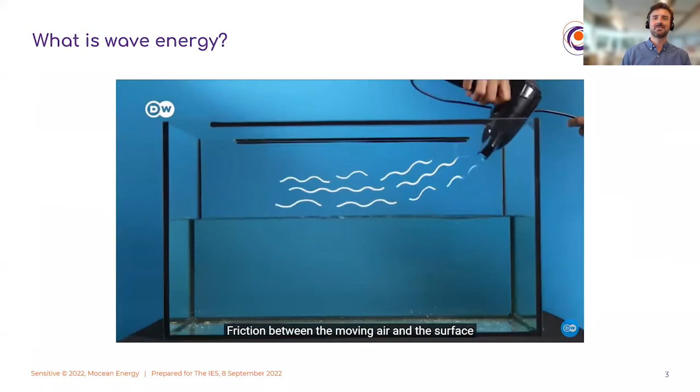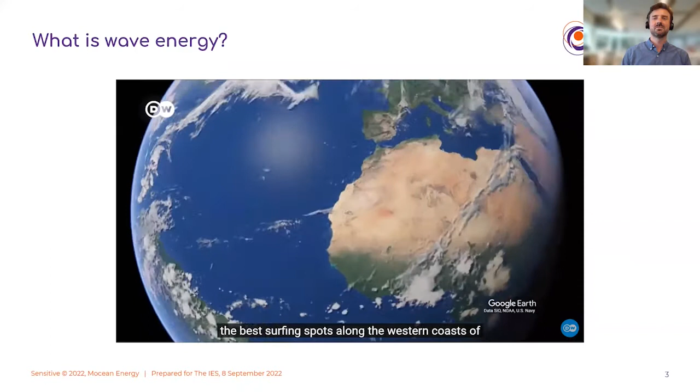For those of you who don't know, waves form when wind blows over the ocean. Friction between the moving air and the surface of the water causes ripples that eventually grow to form waves. The size of waves depends largely on three things: the strength of the wind, and how long and far it blows unobstructed over a stretch of water. Which is why you find the biggest waves and the best surfing spots along the western coasts of North and South America, Europe, and parts of Africa and Australia.

So with waves, it's not that each particle in the water travels from ocean to coast. Instead, each one remains almost in the same place, moving in a circle as it gets energized by the wind. The energy is then transferred along to the next particle and so on. They move with the most intensity at the surface, dwindling the deeper you go. Which kind of explains the sheer diversity of devices that attempt to capture different kinds of movement. At the surface, near the seafloor, and at the coast.

Okay, I'll just leave it there. I find that video better than I am at explaining what wave energy is. And it's quite a good video if anyone has the time, 11 minutes to watch it later on.

So now for a bit of background on Mocean Energy. So Mocean was founded by myself and a guy called Chris Retzler in Edinburgh in 2015. I'm American. I came over to Edinburgh to do my PhD at the University of Edinburgh, working on, surprise, surprise, wave energy research. Chris was the principal scientist at a company called Pelamis, which was once one of the biggest wave energy companies in the world, but unfortunately went into administration in 2014.

And Chris and I met up through the university, started to work on some ideas, and eventually formed the company. We had some funding from a funding body called Wave Energy Scotland, and that was staged. So the project got larger, the funding got larger, and that allowed us to grow the team. In 2019, we were at 6 people. And then more recently, this is a picture taken in 2021 at the launch of our Blue X prototype. And now we've got 19 people. So it's been very exciting growth over the past few years.

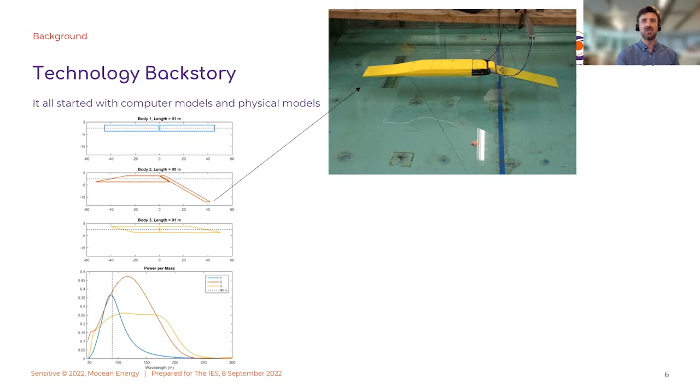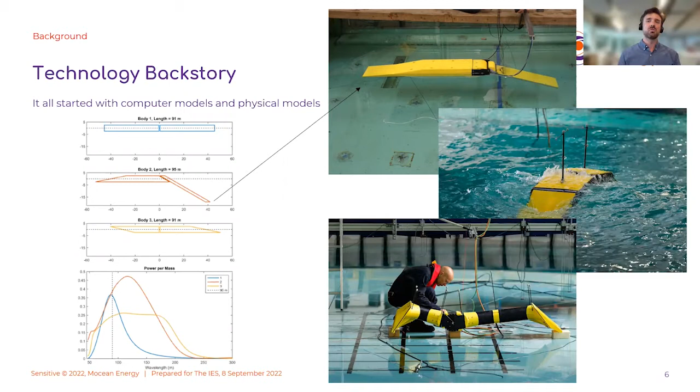And so we started out with fairly crude models, fairly sort of crude pictures, and then we built some physical models and tested them in wave tanks. But as we progressed through our technology development, those models became nicer and nicer, and so we just had a real opportunity to develop our technology.

The majority of that technology development has come through what's called the Wave Energy Scotland Novel Wave Energy Converter Program, or WES NWEC program. That started at stage 0, essentially just filling out an application for the program. That application consisted in part of this numerical modeling exercise and optimization that we did, that we presented and said, here's our idea. This is what we'd like to do.

We were successfully awarded a stage 1 project that we did in 2016. I would describe that as kind of a feasibility study. We further developed the concept. We further optimized it. We estimated the levelized cost of energy. We did some engineering. We kind of expanded on it. Then we went through another stage gate. So 8 companies were awarded stage 1.

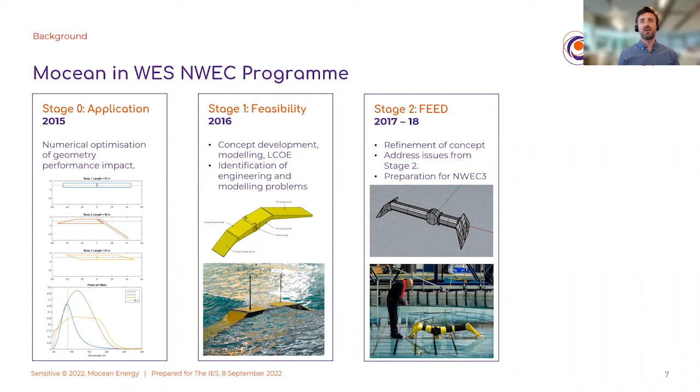They then down selected to 4 companies who were awarded a stage 2 project that went from 2017 to 2018. We further refined our concept. We addressed some issues that we identified in stage 1, and we prepared for stage 3. They then down selected again and awarded 2 companies 3.3 million pounds to build a prototype of the design that was developed through this program.

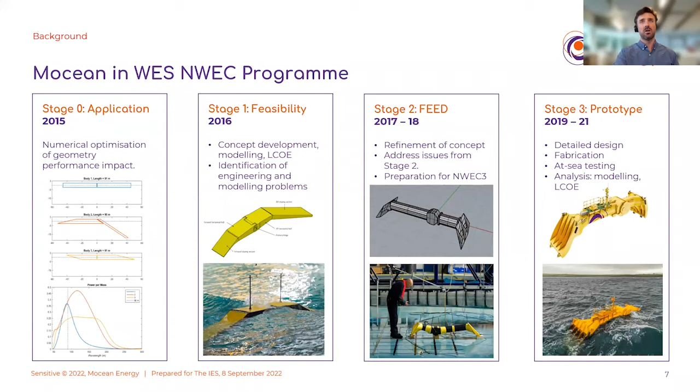I'll tell you more about that stage 3 at the end of this presentation. But that was a big launching point for us. Quite a big funding award, really enabled us to grow as a company.

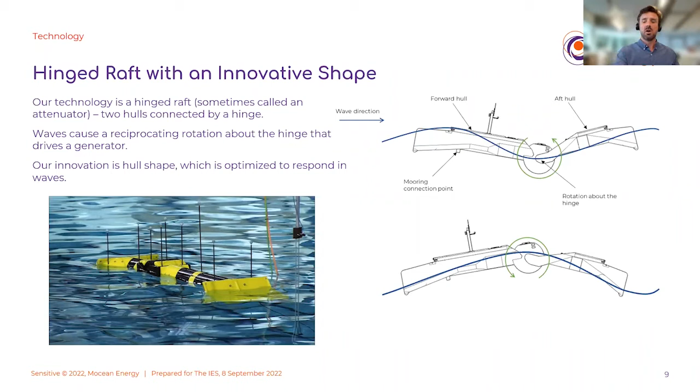So what is Mocean's technology? Our technology is a hinged raft wave energy device with an innovative shape. I'll just play this video. Waves cause a reciprocating rotation about the hinge that drives a generator. We've developed new hull shapes through this optimization process that induce it to move more in waves. The more you move in waves, the more power you generate.

So a little bit more about that optimization process. It starts by writing code that programmatically creates lots of different shapes and then runs them through a simulation, where the simulation estimates the energy production, things like that. We then wrap that geometry generation and simulation code up inside an optimization routine.

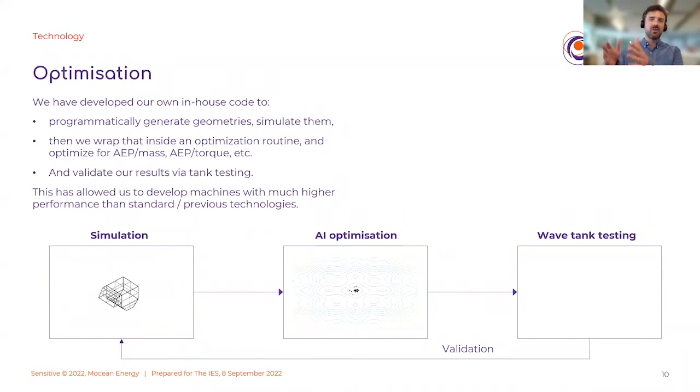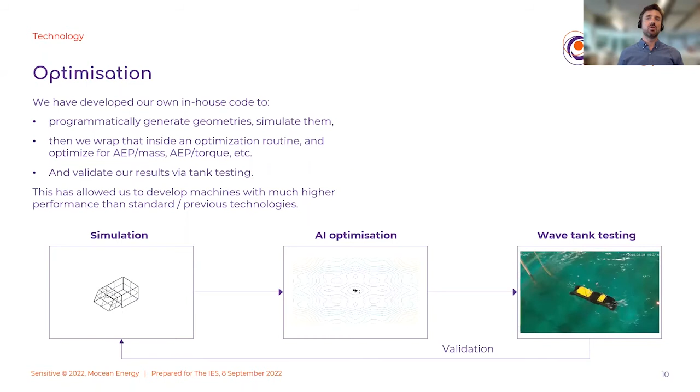This is showing what's called a particle swarm optimization, where it's kind of like a flock of birds that fly around looking for the optimal location. The optimization changes all the parameters, trying to find the best one. That returns a design, and we build that into small scale models and test them in wave tanks to validate that the result that we're getting is representative of reality.

This process has resulted in what we call high performance wave energy machines. The figure in the top right is showing our novel geometry compared to a standard hinged raft, where our novel geometry has the plates on the front and back, which we call wave channels, and the standard raft doesn't. On the x-axis you have wavelength, and on the y-axis is power per mass. So we're producing a lot more power for the same size machine, which means that we can generate electricity at a lower cost of energy.

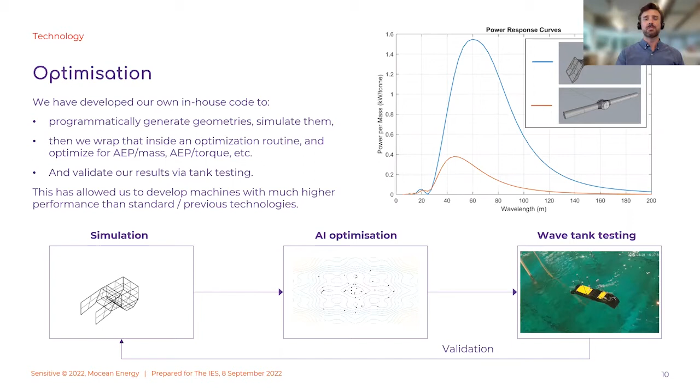So why is this machine behaving this way? What is it about these plates that induces it to produce more energy? I won't go into this in too much detail, except to say that wave energy is essentially a mass spring system. You have some mass of machine that's excited by an oscillatory wave system, and it bounces up and down in the sea.

If you have just a single degree of freedom mass spring system, just a mass on a spring, there's one resonant frequency, one frequency at which it will bounce up and down. But what we have is a multi-degree of freedom system. It only extracts power in the hinge, but it can move in surge, it can move in heave, it can move in pitch, as well as in the flex mode of motion.

And what we found is that the coupling between these degrees of freedom, and this is a well understood physical principle, if you have multiple coupled degrees of freedom, you can have as many resonances as you have degrees of freedom. So in theory, we could have sort of 4 active resonances. And I think we do,

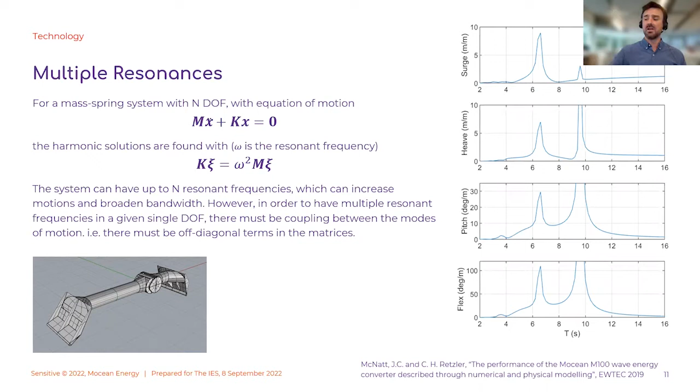in some analyses, but really what we find is that we have at least 2 resonant responses of the machine at 2 different wave periods, which amplifies the motion and broadens the bandwidth so that it responds over a variety of wave frequencies.

Another really interesting result of the research we're doing is that the wave channels, this geometric feature that we have on the front of the machine, we believe creates a kind of fluid resonance. So we're working with a researcher, Cathal Cummins at Heriot-Watt University, to try to understand this better. And he believes it's a type of Helmholtz resonance.

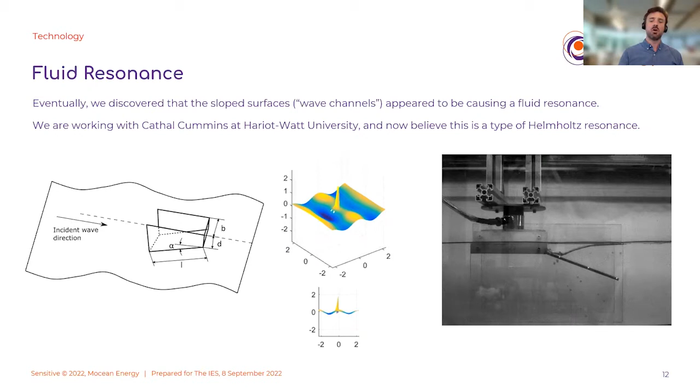So I'll show a couple of videos here. This first one is from a numerical simulation. This is what the numerical model is predicting the fluid behavior will be like inside this sort of cup wave channel thing, and it's showing a resonant response of the fluid. So you're seeing that really high spike that goes way up and way down. That's not physically possible, but that's what the numerical model predicts.

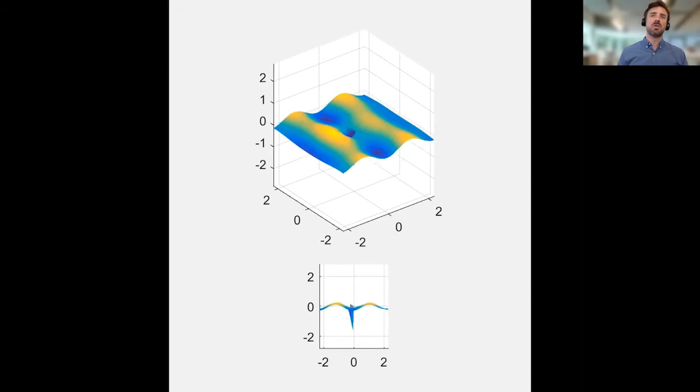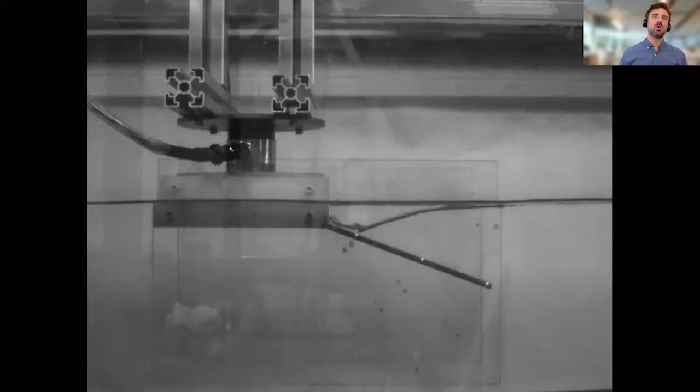We've done some experiments to try to understand this. So this is sort of the experimental version of that video, and this is a wave channel shape in a flume. And if you look closely, you can see this kind of line moving past. That's the incident wave, which has a quite low wave amplitude. And then you can see the fluid moving inside the wave channel, which is moving with a much higher amplitude. So it's going up, and it's much higher than the incident wave, and it's sort of breaking a bit and sloshing.

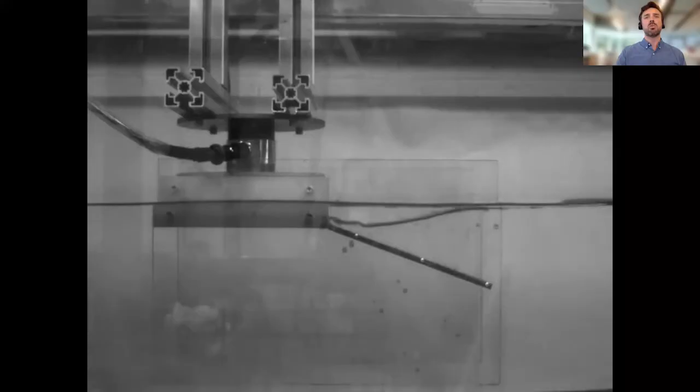So we think these two aspects, the multiple resonances and the wave channel resonance, are keys to why geometrically we can get more power out of this machine than without our geometric features.

And so what are we doing commercially as a company? Fine, you've got great technology, you got some funding to build a prototype. Obviously it's important for companies to generate some money. So our first market is to develop small, when I say small, it's all relatively small machines to provide power for offshore, off-grid equipment. So in the first market, we're not attempting to provide power to homes or to the mainland UK or Europe or anywhere, but we're building machines that are about the size of our prototype and using them to supply power for offshore projects.

So these projects could be in the ocean science industry, they could be applications in offshore wind. Maybe ironically, we're actually looking at applications in oil and gas. So the image on the right illustrates that type of application where we would provide power to an offshore tieback, which is what's connected to the seabed and tied back to a platform to extract hydrocarbons from the seabed.

And so in this case, the table is giving an example of how that project commercially plays out. So with a traditional method of getting power to the tieback, which is using a cable. So traditionally they use a long subsea cable that connects the tieback to a platform for power. And so in the project we looked at, it was a 30-kilometer tieback, and it was going to cost about 13 million pounds to install that cable.

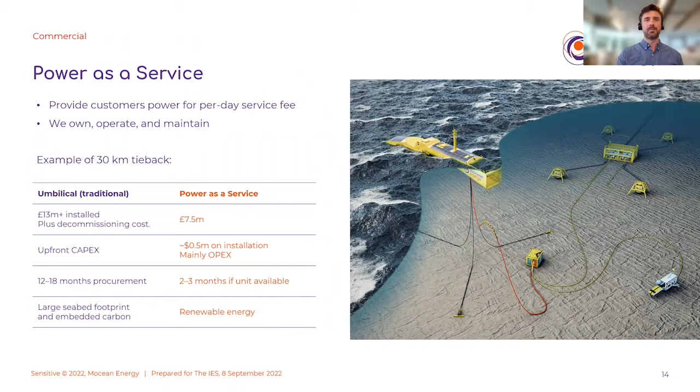So in support of our commercial rollout, we're doing a project called Renewables for Subsea Power, where we will deploy our existing prototype with an umbilical cable that takes the power down to the seabed, and it will be connected to some demonstration subsea equipment, including subsea batteries, an autonomous underwater vehicle, and what's called a subsea control system.

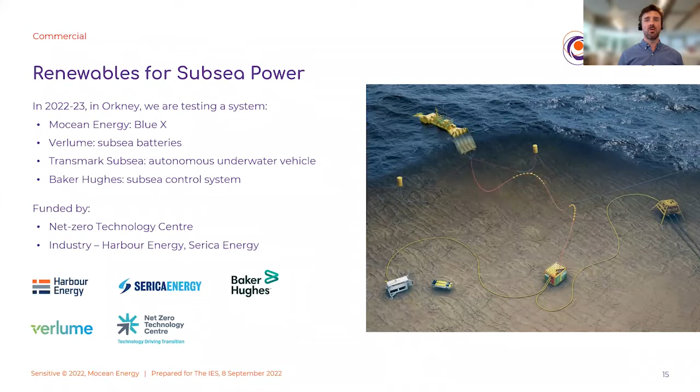We have funding to do this from the Net Zero Technology Centre, as well as two customers, Harbour Energy and Serica Energy. So all being well, we'll have that equipment offshore this autumn and test through the winter and into the spring. But that is just the first step in our roadmap.

So we are starting small with a product line we call Blue Star for offshore off-grid projects where they need tens of kilowatts of power. The next step in our roadmap is what we call the mid-scale, where we're developing a product line called Blue Horizon that will be rated in the hundreds of kilowatts. And one of the markets that we're more excited about, or we think is quite a big market, is power for islands and remote communities.

So we are engaging with stakeholders in different islands, and there is a gap where solar, some islands obviously are at northern latitudes, but solar, even in tropical islands, is not going to meet the entire needs of these islands. And currently islands are frequently running on diesel generators. The power is obviously very CO2 intensive. The diesel has to be shipped in. It's getting very expensive. So as I say, solar isn't necessarily going to meet 100% of their clean energy requirements.

Many islands don't want wind because of the visual impact, and many islands have great wave resources and also have a strong historical and spiritual connection with the sea. So wave energy is really very much of interest, and because they already have high costs of energy, it's a good stepping stone market for this technology.

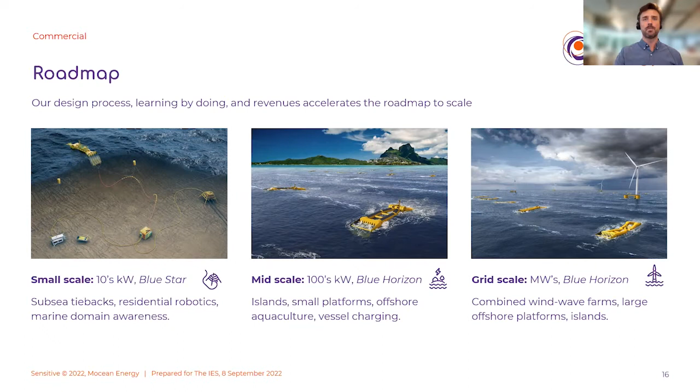So that's our commercial roadmap. Now I'll tell you a bit more about the BlueX project. So again, BlueX is our prototype wave energy device developed through the Wave Energy Scotland program that we completed and tested last year. So I'll start with a video, give myself a quick break from talking.

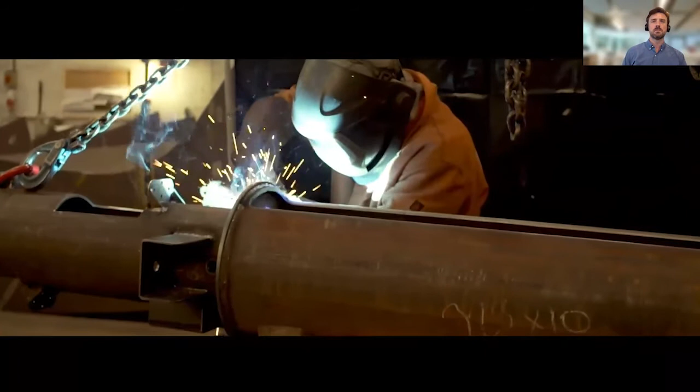I'm Cameron McNatt. I'm the co-founder and managing director of Mocean Energy. I started Mocean Energy with Chris Retzler 5 years ago. We've developed this wave energy converter technology. It's a hinged raft, so 2 hulls connected by a hinge, and waves cause a rotation about the hulls that drives the generator. Compared to traditional hinged rafts, we're producing anywhere from 3 to 8 times as much power for the same size.

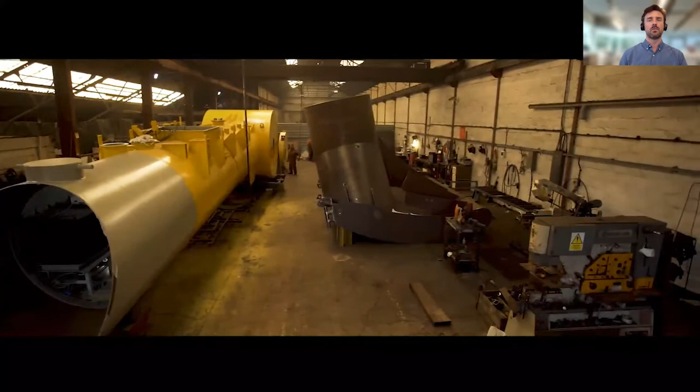It's been years really in getting to this stage. It feels great to kind of finally get to a stage where it's so close. The build phase of the device has taken about 2 years. Having such a fantastic team and a great group of contractors working for us has been an absolute pleasure, really. It's really made the project come together in a timely manner, and we're really excited about the next steps.

Hi, I'm Tim Hurst and I'm the Managing Director of Wave Energy Scotland. Scotland has a huge wave energy resource, probably the biggest in Europe, and that gives us the opportunity to use technology like this to generate low carbon electricity. So we're in Orkney, which is the home of the European Marine Energy Centre, a place where we're going to demonstrate the BlueX wave energy technology.

We built EMEC in Orkney because it's the best place to do it for learning how to make the most of wave energy. I've lost count how many machines we've had here. It's probably about a dozen or so wave energy machines, and a lot of lessons have been learned from this.

We're out at EMEC's Scapa Flow wave energy test site to see our wave energy converter BlueX. It's been going great so far. BlueX has been in the water for 2 months. Really great site to start our testing. We're getting about 1 weather system a month where we're generating some data. But we're also getting to prove a lot of our operations and verify the performance of the machine.

So we're going to continue to test here in Scapa Flow through the autumn. We'll take the machine out and we'll add a bit of equipment on there. And next year we're doing a project called Renewables for Subsea Power, where we will connect BlueX to some subsea equipment and demonstrate providing power and communication to that equipment, which is the commercial use case.

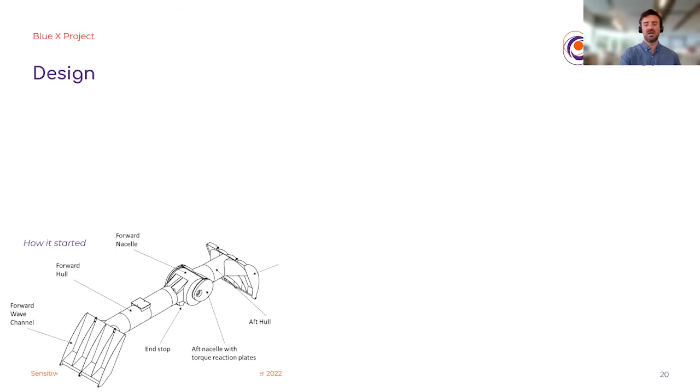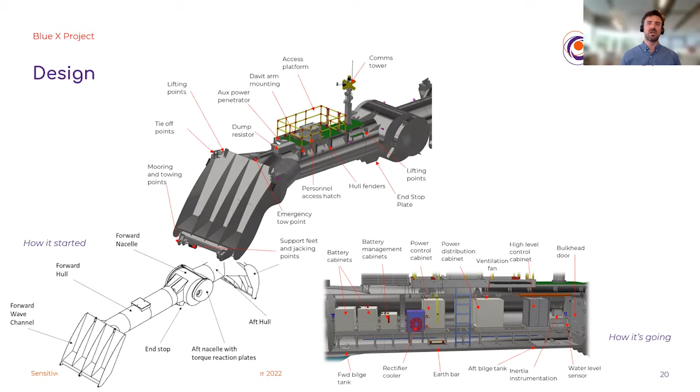So the BlueX project really started with a pretty rough design, to be honest. This is where we were at the end of stage 2. We had a sort of concept level design of how it would be built, but as these things go, the devil's in the details. There were so many more things that needed to be considered, everything from how it's towed to how people get on it and get in it to how cables are routed. All of that needed to be thought about and designed.

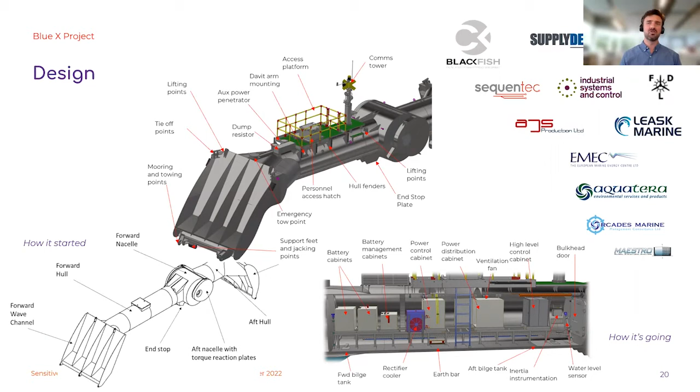And we were very fortunate to not have to do that all by ourselves, but we have numerous partners and subcontractors specializing in different aspects of the mechanical, electrical, control systems, generator, and so forth, who are helping us to get this machine designed.

A big part of the development was the generator. The generator is quite a specialized piece of equipment because we're doing a back and forth motion, and it is high torque and low speed. That's not a very natural place for generators to operate.

So we worked with the University of Edinburgh, who's developed a generator called the C-Gen that was pretty well suited for this application. That was built by a company called Fountain Design, and then a company called Supply Design provided the power electronics.

Before we put the generator in the machine, we did what's called some back-to-back testing. So we actually built two of these drivetrains and connected them up to one another and used one to drive the other to ensure that the system was working before we integrated into the wave energy device.

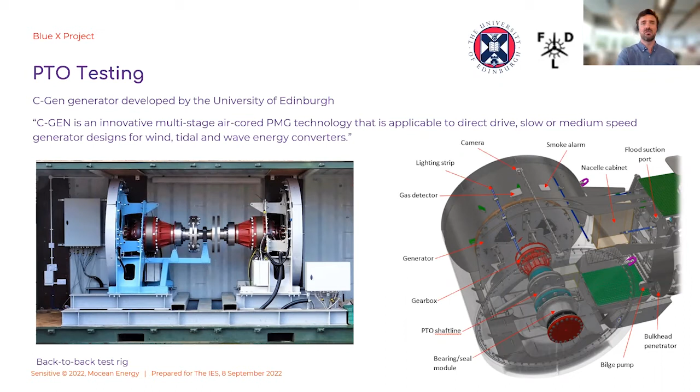So once we had designed it and tested the generator, we started to build it. The machine was fabricated at a relatively small fabricator in Cowdenbeath. We built it in sections and actually assembled the internals before it was completely welded together. Unfortunately, the fabricator wasn't big enough for us to build the entire machine in one piece inside their building. So this is very much a lesson learned.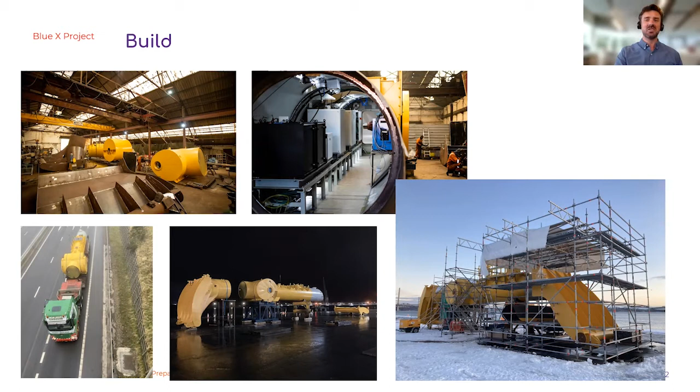We transported it in pieces from the fabricator out to the quayside in Rosyth here in Scotland to complete the build. But that was in January of 2021, which is not a very nice time to be doing this kind of work outside. I really feel for the team that were out there. And once again, not something that we could do by ourselves. We're really fortunate to be supported by a raft of partners and subcontractors.

Once it had been built, so this photo was, I think, March 2021, there was still work to be done. So we did a process we would call wet commissioning. We trialed lifting, we put it into the water for the first time. We had to get the ballast just right.

It was designed to sit level at a certain trim, but as it's built, it's never quite exactly as you plan it. And so we used these water tanks and we filled them up with water to adjust the trim until we got the trim to where we wanted it. And then we replaced that water with steel ballast.

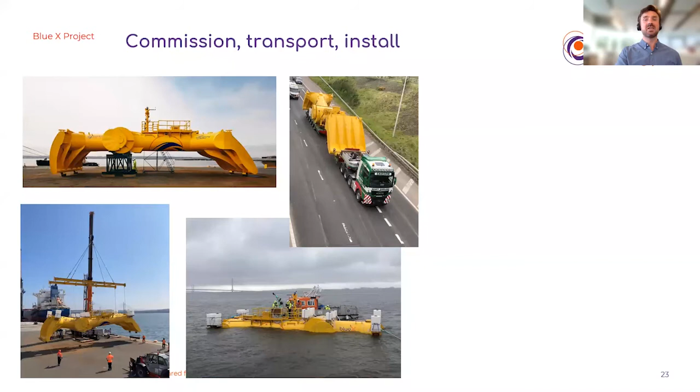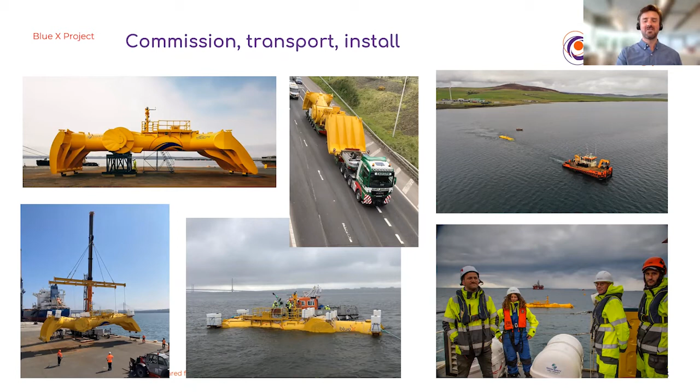Once it was complete, it was a pretty big thing, but it was small enough that it could be fit on a flatbed truck and actually road transported and then taken by ferry from Aberdeen up to Orkney. Once it was in Orkney, we got it in the water and we did some tow tests, and then we towed it out to the site where it was to be deployed. And there's a team in the bottom right corner looking very happy after the installation for the first time.

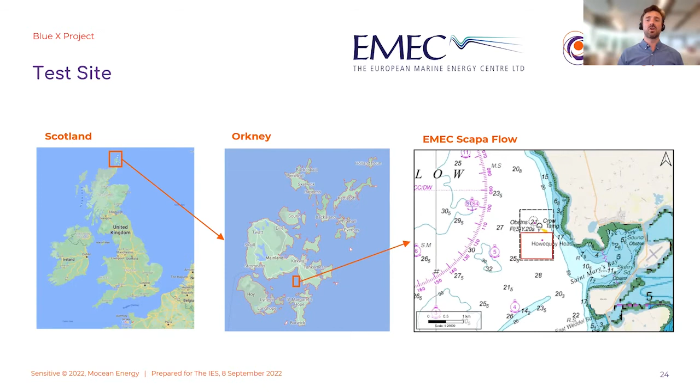So where was it tested? It was tested at what's called the European Marine Energy Centre, which is a test center for wave and tidal devices that's actually been around since the early 2000s. We tested it in Scapa Flow, which is a relatively sheltered body of water where EMEC has a test site. It was a very good place to start our testing rather than going to more exposed Atlantic Ocean conditions.

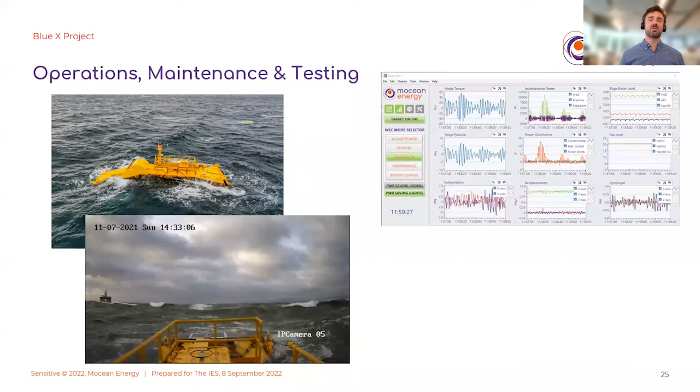We had software that was monitoring the device. We had a sort of live data feed, but also the data was collected on the machine and then sent up to the cloud. And we also got a chance to practice our operations. So we went out and did some operations on the device while it was at sea.

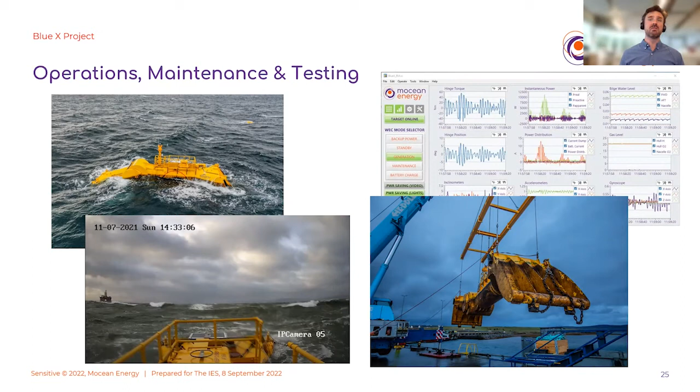We also did one planned maintenance operation where we brought it back to the quayside, lifted it out, did some work, put it back in the water and towed it back out to site. And we were able to do that in 4 days, which we think was a real success for the project.

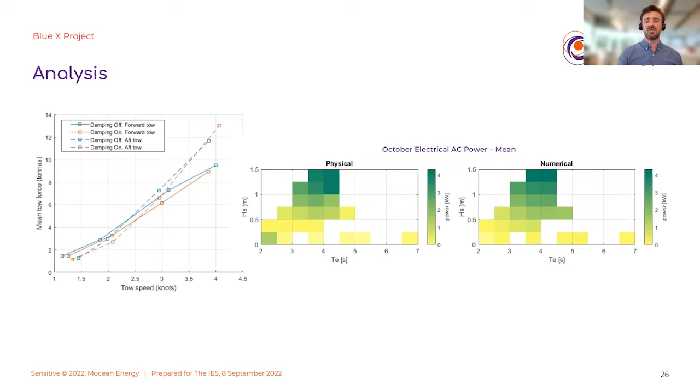And so what are some of the lessons learned from this project? It costs more than you think. It takes longer than you think. It's much more complicated than you think. But there's a lot of IP and know-how in building a prototype.

So in the technology section of this, I talked about how we designed things on a computer and we tested them in a wave tank and we learned all this stuff about hydrodynamics. And yes, we did. That was great. That was really important to the technology development and the IP. But that's only a portion of what you need to know in order to actually build things that go out in the sea and do what you want them to do. So it was a really fantastic learning experience, and will serve us well moving forward into our commercial phase.

But I think the most important lesson of all is, it takes a great team, and we're really fortunate at Mocean Energy to have such a good team, including Ethny's friend, Alfred, who's one of our numerical modelers, who introduced me to Ethny and got me the chance to speak to you all today. So thank you very much.